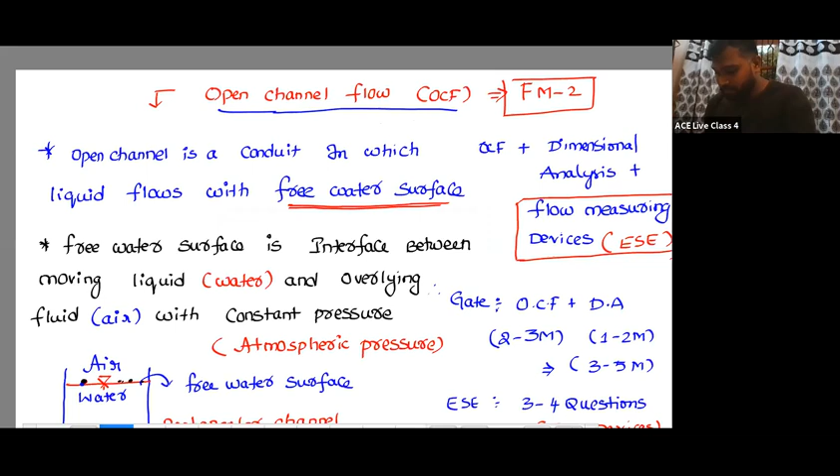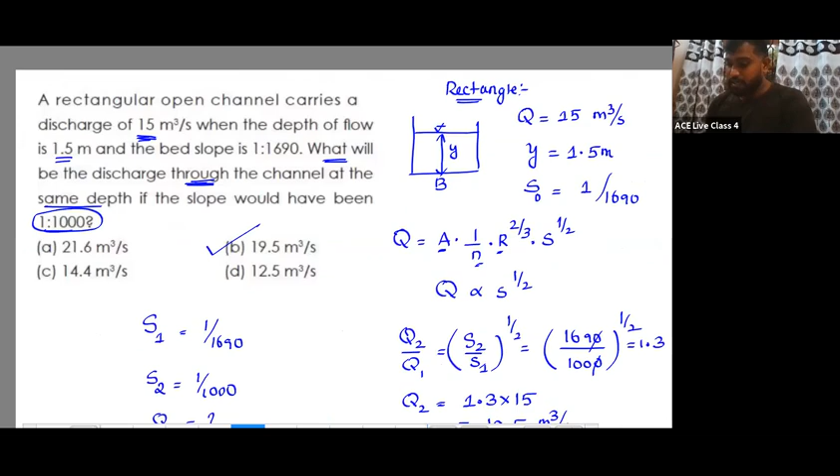Okay. So we have discussed this. In yesterday's class, we discussed the surges, and I have given you the question also. And we know how we have determined this. Okay. So now let's see the last part in the open channel flow.

Wave patterns. Wave pattern by dropping a stone in a flow, river, or pond. So how are the wave patterns going to be?

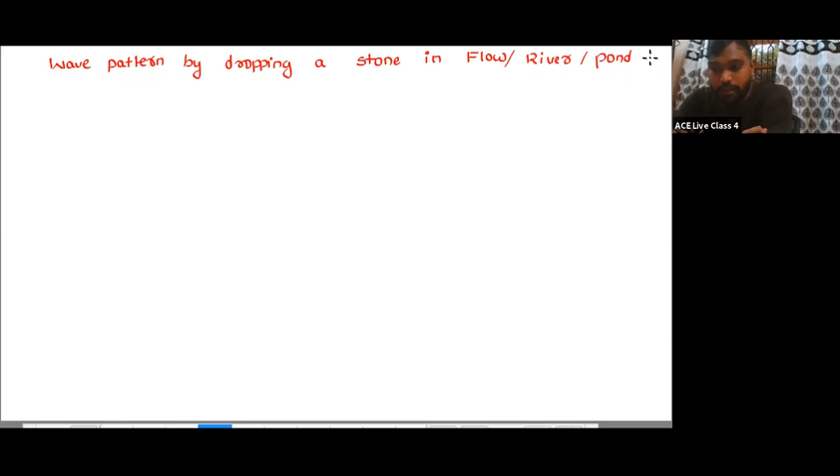See, there are different types of flows we have seen in open channel flow: subcritical flow, supercritical flow, and critical flow. Now, if these types of flows are there, then what happens to the wave pattern? How are the waves going to change? So the pattern the waves follow when you drop a stone in the flow of a river. Now, let's see that.

A. Give me a minute, please.

Okay. Now, let's see. So what happens when you drop a stone in the flow of a river? And based upon this, we can say whether the flow is subcritical or supercritical. Now, we know the celerity concept; I told you celerity means critical velocity of the wave. Yes or no? I have discussed the celerity concept.

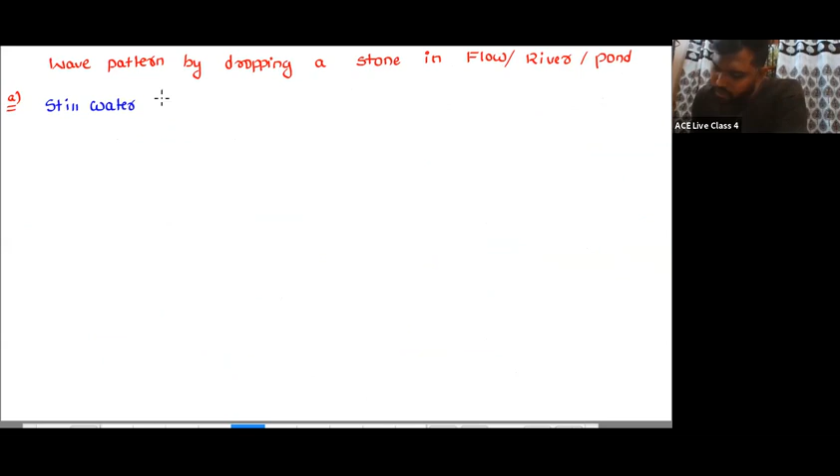yeah. So then definitely you're going to see some portion of the flow having some waves, right? Now, how are those waves going to travel? So now, first, if I drop a stone in a pond, means still water. What is the meaning of still water? Its velocity of flow is going to be zero. Let's see.

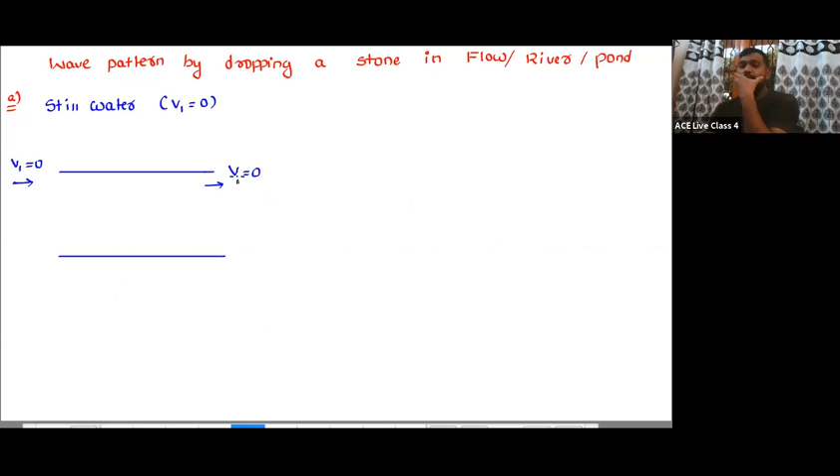In the top view, there is a top view, my dear. Now, this is the flow, but what is the initial velocity of the flow? Zero. The velocity of flow is zero. Okay. Now I am going to drop a stone over here, and this is the axis where I have dropped the stone.

Now if I drop a stone over here, what happens to the waves? See, when you drop a stone into a river or a pond, definitely you can see the waves. Yes or no? Some of the waves will travel towards the upstream, and some will travel towards the downstream. And whatever waves travel, they must have some velocity VW.

Okay. So when I drop a stone, some waves are developed, and you know what is the meaning of VW? Velocity of wave. And those waves have some velocity on the upstream side and the downstream side. Now, if you know that, then what is the celerity, please? On the upstream side, what is meant by celerity?

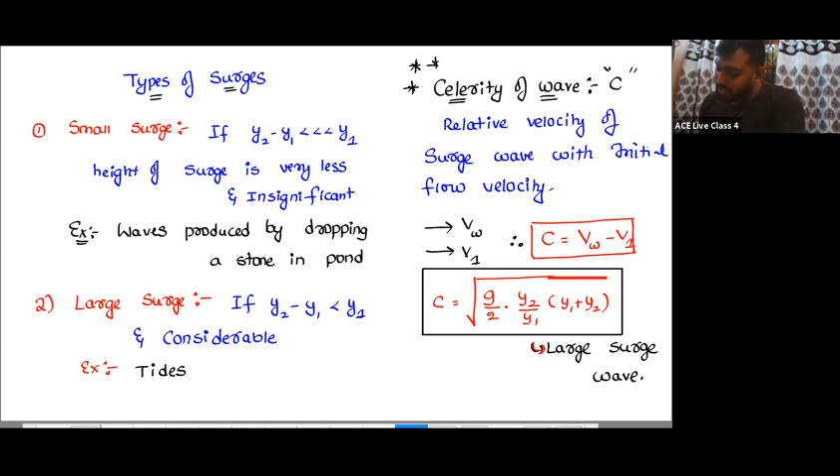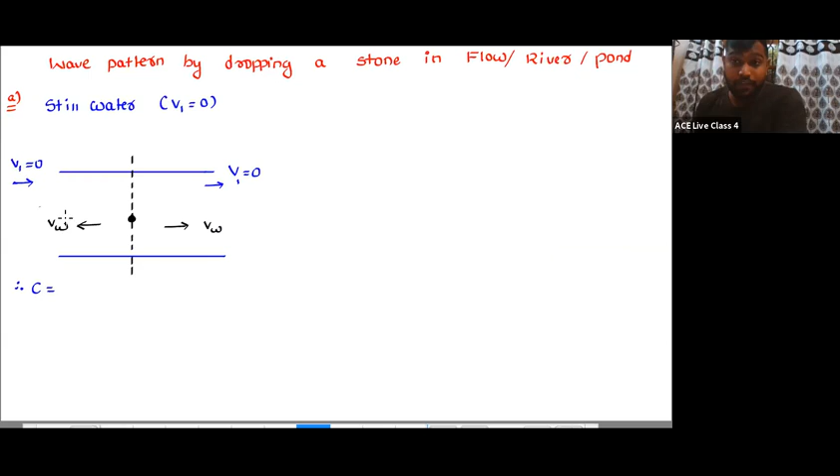Celerity means the relative velocity of the surge wave with respect to initial flow velocity. Now, when the surge is traveling towards upstream, see, both are moving in different directions or not. When both are moving in different directions, the relative velocity is VW plus V1. But here, the relative velocity is VW minus V1 because both are moving in the same direction.

And you know that whatever the velocity at critical flow, that critical velocity is nothing but celerity. Yes or no? Now, please observe. So what I do is I'll keep V1 as 0.

If I keep V1 as 0, now what is the velocity of the wave with which it is going to travel? The velocity of the wave with which it is going to travel is celerity. And that celerity is nothing but critical velocity or not? Yes or no? So keep that in your mind, my dear.

When you drop a stone in a pond where the initial velocity is 0, still water, some waves will move towards the downstream, some waves will move towards the upstream. So in both the cases, the wave must be having some velocity Vw, and in the case of still water, that velocity is the same on downstream and upstream. And if the waves are moving with the same velocity on upstream and downstream, are those waves symmetrical or unsymmetrical? Those are going to be symmetrical waves.

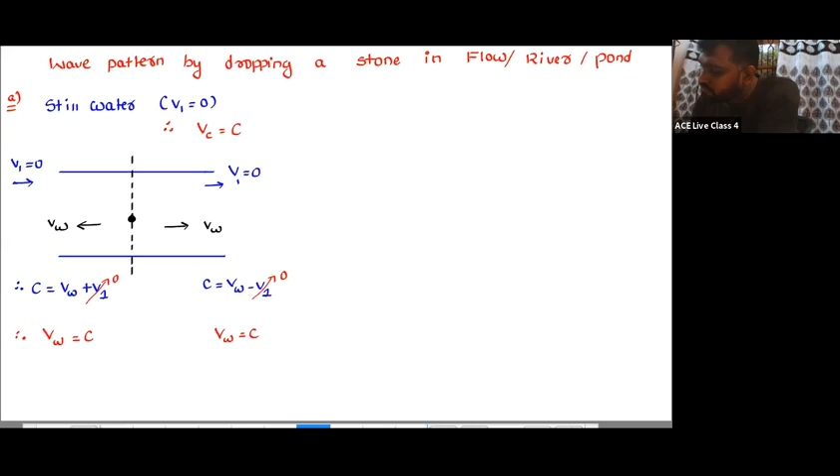So now if I draw the wave pattern, those waves are going to be symmetrical waves. Whatever the wave pattern here, when you drop a stone into still water, the waves developed are symmetrical to each other. So this pattern is going to be a symmetrical wave pattern. Can I say it as a symmetrical wave pattern? And waves move on both sides. So when you drop a stone, why?

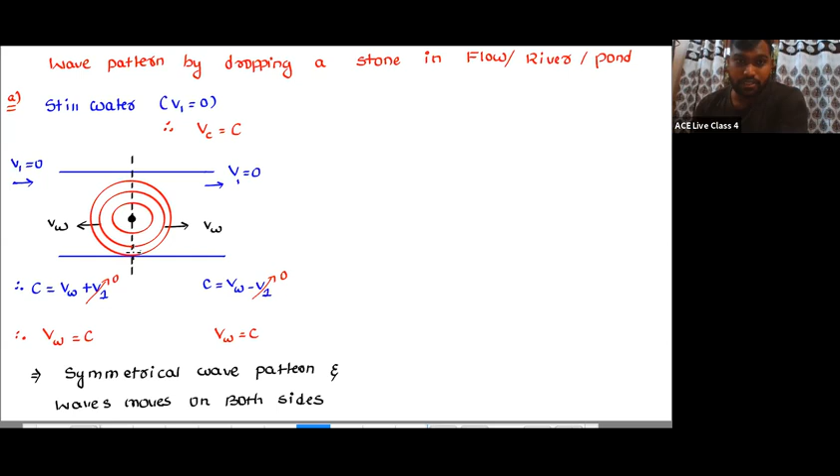If you're observing still water, if you drop a stone or keep some obstruction, you can see the ripples, and the ripples are the same on all sides in still water. Why? Because when you drop that stone, the waves move with the celerity in all directions. That's the reason it gets a symmetrical wave pattern. Okay.

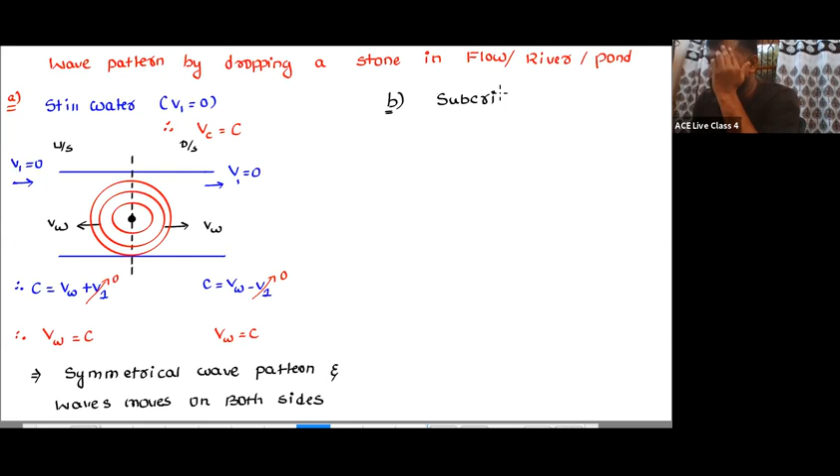So if V1 is 0, then how is it moving downwards? V1 is 0 means let's say it is still water. Generally I am taking this one as upstream and this one as downstream. Now let's see if it is a subcritical flow. What is the meaning of subcritical flow? It means a flow with a lesser velocity, the velocity of flow is less than the critical velocity. And what is that critical velocity? Critical velocity is nothing but C, means celerity. Yes.

Again, this is a river. Now in this case, this is the axis of dropping of a stone. This time the velocity V1 is not going to be 0. V1 is greater than 0. Let me say the flow is coming like this from upstream to downstream side. Now I am dropping a stone over here. So what is going to happen? Tell me. Same. These waves will move with some Vw, on both sides.

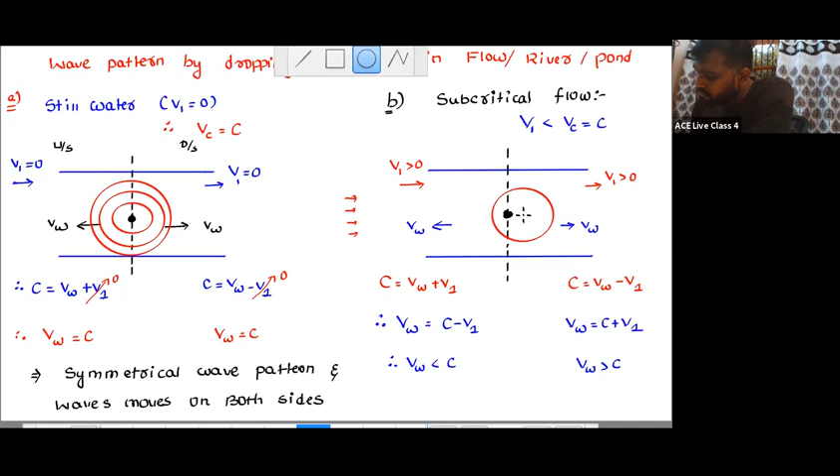You can observe more waves will travel towards the downstream. More waves will travel towards the downstream. So I can write: in subcritical flow, by dropping a stone, waves move in both directions, unsymmetrically or symmetrically? Unsymmetrically.

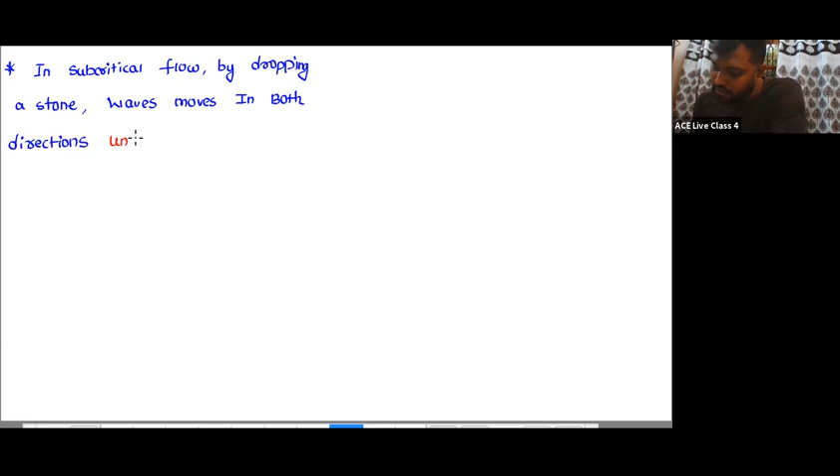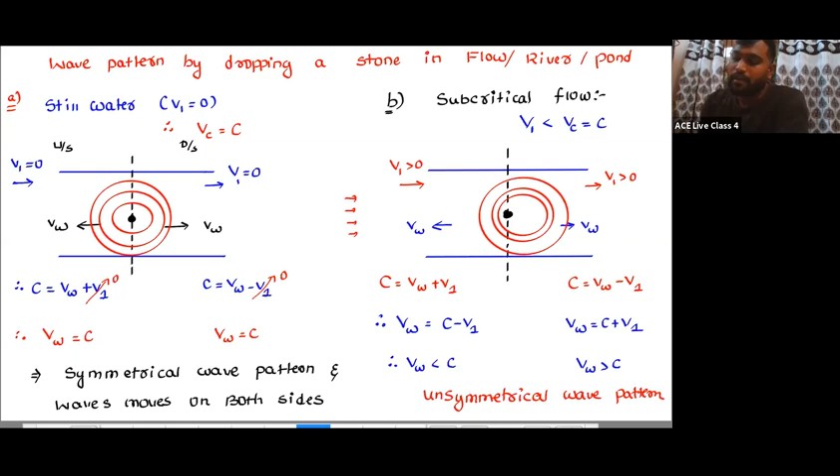With more on downstream side. So this is an unsymmetrical wave pattern. Okay. So I can say this is unsymmetrical wave pattern. Now, if you see, this is a subcritical flow, then let's see. I am increasing the velocity of flow. Earlier, I take the still water and then the subcritical flow. Now let's see the critical flow.

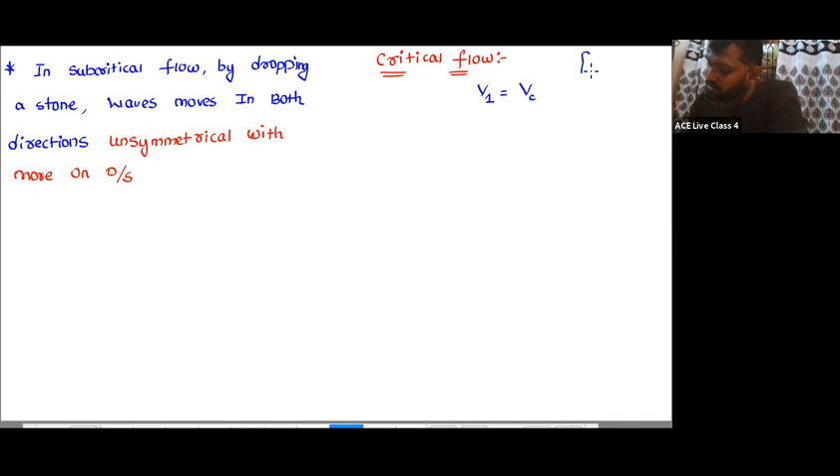Critical flow. What is the meaning of critical flow? Critical flow means whatever the velocity is nothing but the critical velocity, and you know that critical velocity is nothing but the celerity, right? We do know that critical velocity is nothing but the celerity. Now let's draw the same thing. Okay. So same.

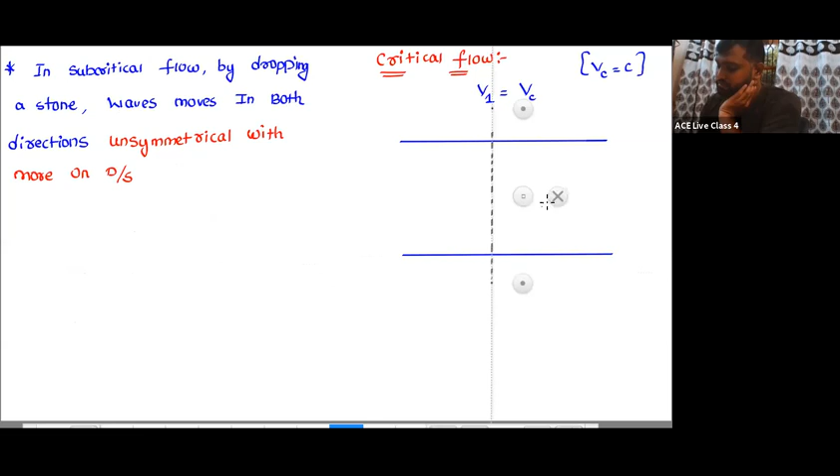Now I'm going to represent the axis where I'm going to drop a stone. This is the axis, and this is the point where I'm dropping a stone. But this time, the flow is moving with the critical velocity. Then when I drop a stone, what happens to the velocity of the surge wave? So here, celerity means VW plus V1. Here, celerity means VW minus V1.

Now, I want VW. What is VW? VW means C minus V1. Yes, sir. And what is V1, my dear? What is V1 in the critical flow? In the case of the critical flow, V1 is nothing but Vc and Vc is nothing but C. C minus C, then 0. And what about here? VW is C plus V1, C plus C, which is going to be 2C.

Yes or no? So now you tell me, in the case of the critical flow, when you drop a stone, on the upstream side, is there any wave pattern? On the upstream side, what is the velocity of the wave? 0. And on the downstream side, what is the velocity of the wave? 2C. You can see over here. On the upstream side, velocity of wave is 0. On the downstream side, velocity of wave is going to be 2C.

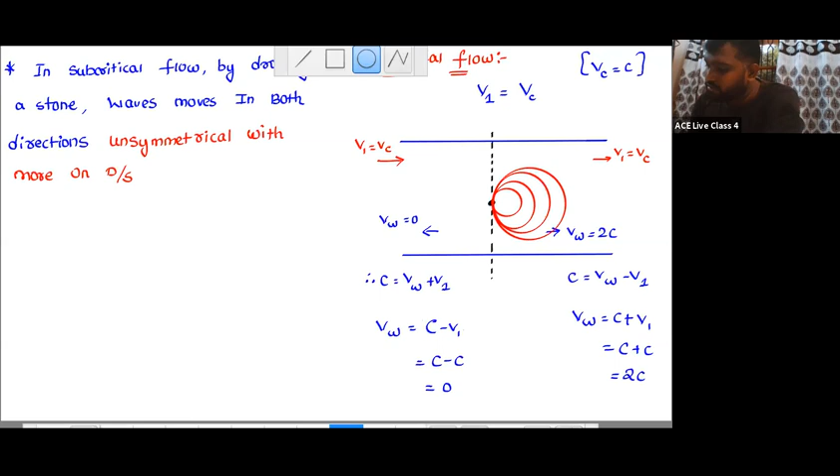Now you tell me, do you think any wave will travel towards upstream? No. No wave will travel towards the upstream. And every wave will travel towards the downstream only. Let's see. You see, all the waves are traveling towards whom? Downstream or upstream? Every wave is traveling towards the downstream, and all these waves are going to be generated tangential to the point of dropping of the stone.

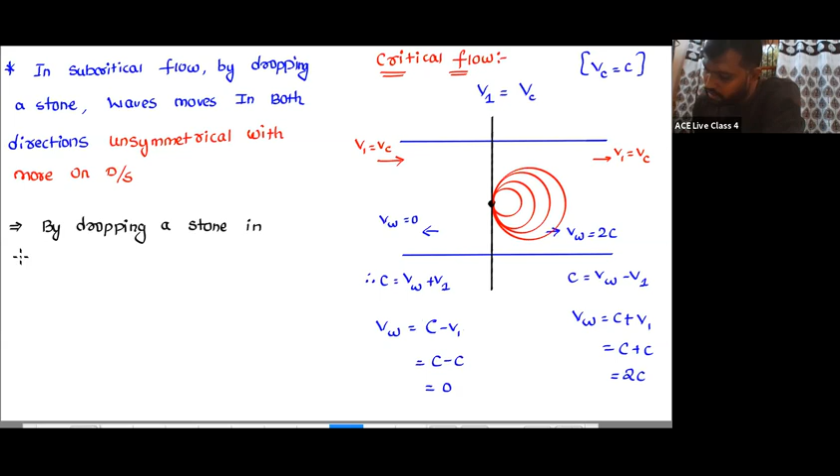So now I can write a point over here as, by dropping a stone in river or in critical flow, waves travel towards downstream side, and wave pattern is tangential to point of dropping of stone. This is nothing but a tangent, my dear, tangential to the point of dropping of the stone in the case of the critical flow.

So I hope you understood what is happening. As the velocity of the flow increases, the wave pattern is going to be moving more towards the downstream side. So yes, practically it is possible. Practically it is not possible, sir. Why we study this topic? To make sure what is going to happen in reality.

In reality, when the flow is there, if you want to predict the type of flow, whether it is subcritical or critical or supercritical, then you can simply keep a pen there, it will cause some disturbance, then the waves are going to travel. Wait a moment, then I can say that for you. Now, the last one is a supercritical flow.

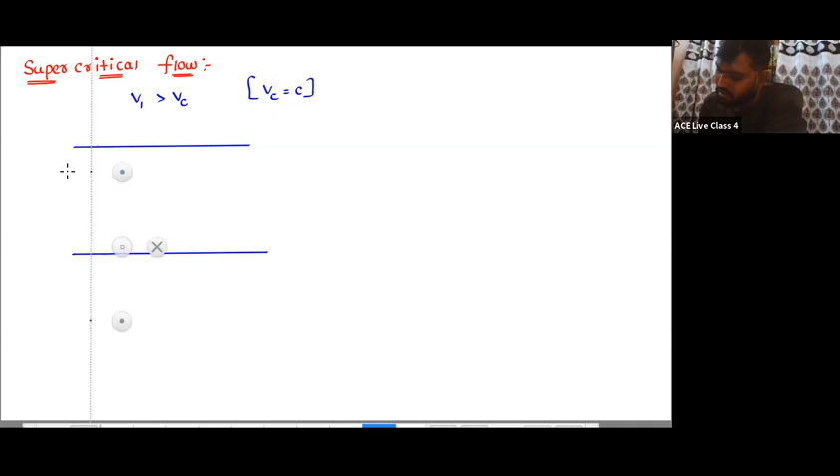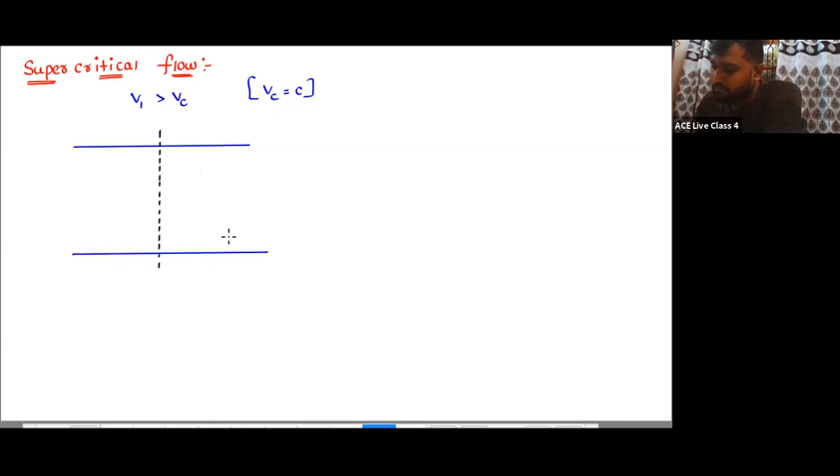Now, there is a point where I am dropping a stone. This time V1, celerity VW plus V1, celerity VW minus V1. Now here VW is nothing but C minus V1, and is V1 going to be more than C or not? Yes or no? So then this VW is going to be less than 0. And similarly here VW is C plus V1, and what is V1? V1 is greater than C. So VW is more than 2C.

Because what is the V1 value? V1 is more than Vc, which means V1 is greater than the celerity. So C plus greater than celerity is more than 2C, C minus greater than celerity is less than 0. See, the meaning of that is, whenever the velocity is going to be 2C, then all the waves are going to start at one point, and all the waves are going to be tangential to the point at which the stone is dropped.

But in this case, the waves will sweep more towards the downstream side, in an increasing wave pattern. Now see. In an increasing wave pattern, and it just looks like a cone. The wave pattern is going to be a conical wave pattern. So this type of wave pattern is the conical waveform.

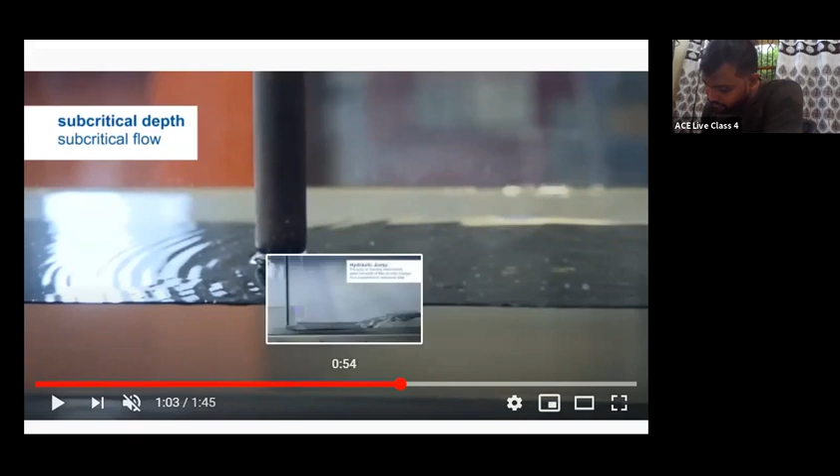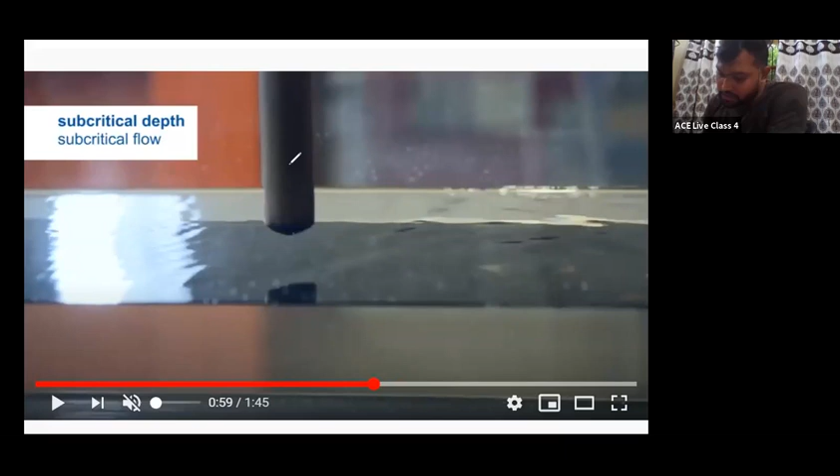Now, see in the case of the subcritical flow, what is going to happen? See here the waves are going to travel in such a way, if this is a subcritical depth. Now I am inserting a broom or a stick. This is the point where I am going to insert. Now let's see what is going to happen. Observe.

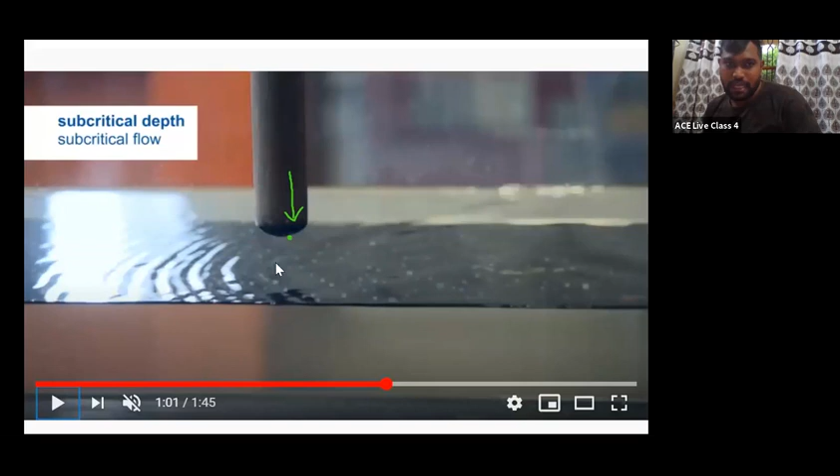So when I keep that, then again observe. You can see the wave pattern, how the wave flows. Yes or no? This is subcritical flow, because subcritical flow means the depth is more and velocity is less. You can see the flow is also moving very slowly. Now when I insert here, the flow is passing in this direction. This is upstream.

So now you can see more waves are going to travel towards the downstream side. So more waves will travel towards the downstream side. Now let's see. Yeah. So more waves are traveling towards this side, right? So in this flow, more waves travel, and less on the upstream. You can see the wave pattern over here. Now, similarly, in the case of the supercritical flow, how is it going to be seen?

In the supercritical flow, subcritical flow, yes, I hope you can understand. Now, you see, in the case of the supercritical flow, the flow is already moving from upstream to the downstream side. Now I'm inserting a broom over here. If I insert a broom over here or a stone over here, now you observe what is going to happen.

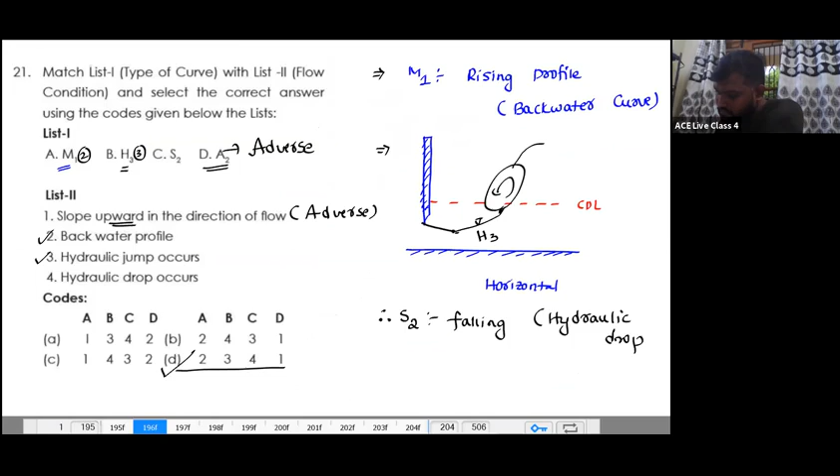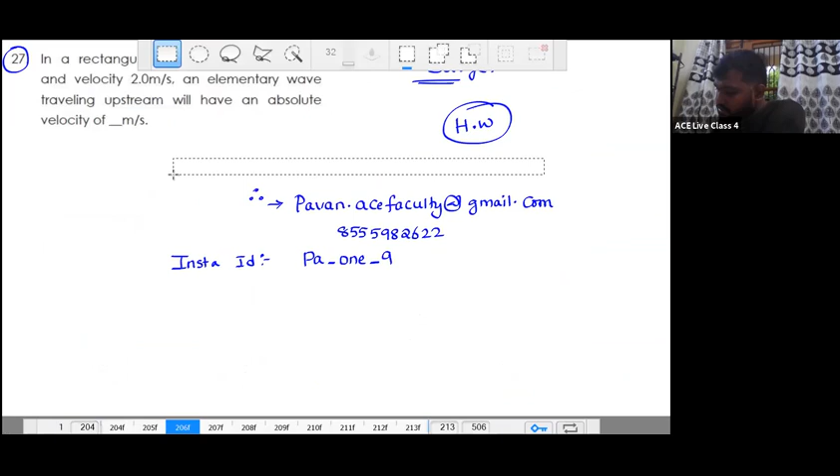Yeah, there is a chance of increasing the weightage for FM2 as they have removed the hydraulic machines. So, okay, yesterday I gave a homework problem, right? Yes, this homework problem, I hope you have done this question. I asked you this as a homework question. Let's see that question, please.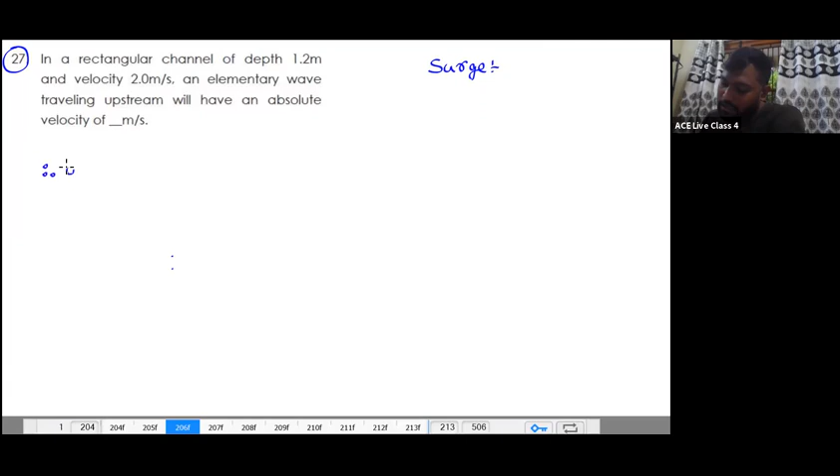Okay. In a rectangular channel of depth 1.2 meters and velocity 2 meters per second, an elementary wave is traveling upstream. You see, they have given the depth 1.2 meters, velocity V1 as 2 meters per second. An elementary wave traveling upstream will have an absolute velocity. If the elementary wave is traveling upstream, generally the flow is towards downstream. Then what is the celerity? The celerity is VW plus V1, because they're opposite in direction, right?

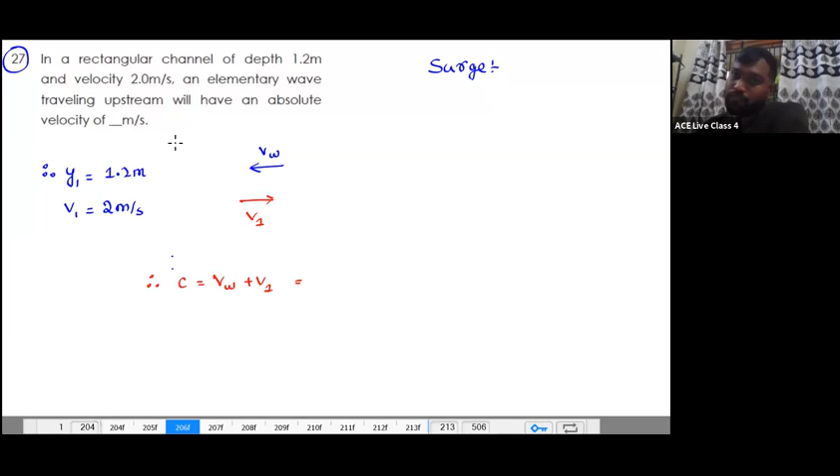Now, you know that this is celerity. Did they mention anything regarding a small surge or large surge? No. I told you when they don't mention anything, you always go with the small surge. Because you don't know the depth, right? You don't know what happened due to that surge. Has the depth been doubled, increased or decreased?

We don't know that. So now, VW plus 2 is equal to root of 9.81 into 1.2. What is this VW, please? Minus 2. The answer is going to be 1.43 meters per second. So that's about the question. Now, let's see the next topics. I hope you understood this.

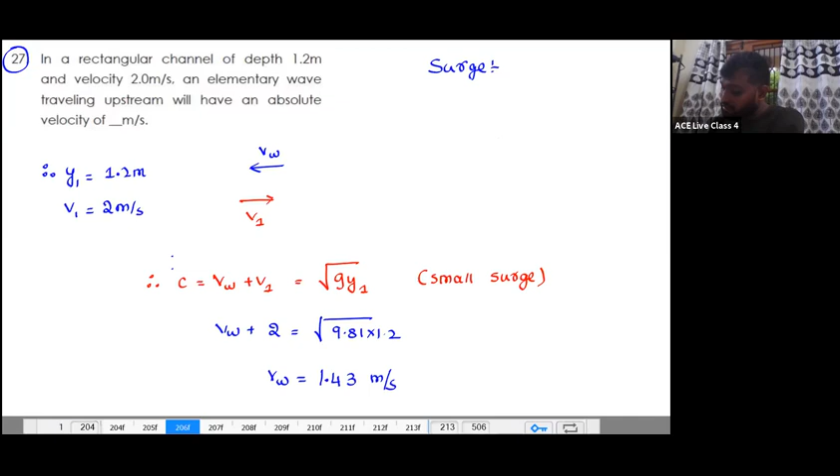Next, the new topic: dimensional analysis. Now, in the case of dimensional analysis, what is meant by dimensional analysis? Why are we going to discuss it? See, this is not only about open channel flow. This is about pipe flow, and this is about civil engineering, what we are going to discuss here.

So what is meant by dimensional analysis? The first definition of dimensional analysis is it's a mathematical technique. Why do we name it dimensional analysis? As a layman, we are going to analyze any civil engineering problem, or any engineering problem, because we can use dimensional analysis for all engineering.

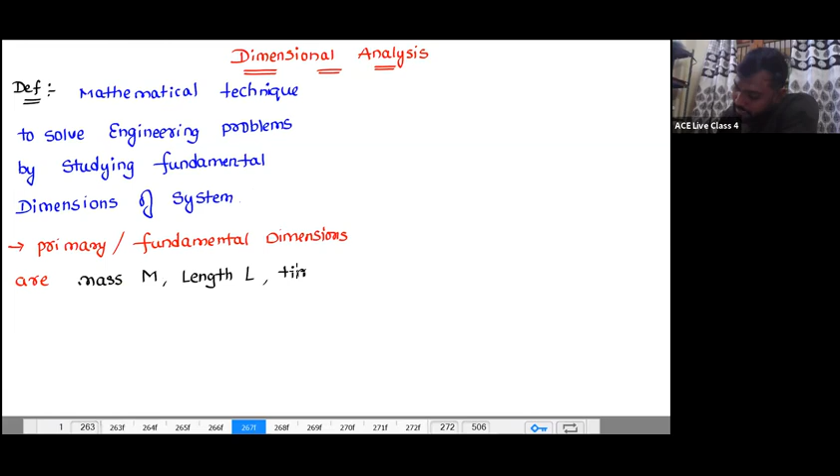Okay, now the primary or fundamental dimensions are mass, represented with the capital M, length, represented with the capital L, time, represented with the capital T.

Okay, and if you go for the temperature in mechanical engineering, you have to look over the thermal also. So there the small t represents the time and the capital T represents the temperature. And in the case of electrical engineering, there you have to look over the electric current in terms of amperes, I, also. But for our civil engineering problems, what we discuss is majorly M, L and T.

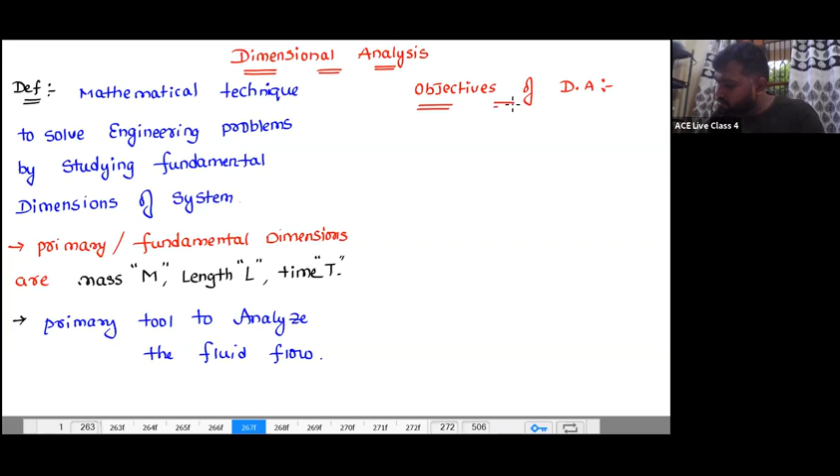So dimensional analysis is going to be a primary tool to analyze the fluid flow. Now let's see what are the uses or objectives of the dimensional analysis. What are the objectives of the dimensional analysis? Objectives of dimensional analysis, or uses of the dimensional analysis.

Okay. See, once I know the system, for example, when a flow is happening, the flow rate is passing through the channel, that is nothing but discharge Q. And how come I say Q is equals to A into V? It is by checking the dimensional homogeneity of the system. For example, if I take Q is equals to A into V, what is the units of Q here? Nothing but meter cube per second.

What is the units of the area? Meter square. What is the units of the velocity? Meter per second. Yes or no? So here meter cube per second, here also meter cube per second. Which means on LHS and RHS, the dimensions are same. And when they are same, they are dimensionally homogeneous to each other, means whatever quantities I have taken on the left and the right, both are having the same dimensions. If they are not having same dimensions, then they are going to be dimensionally non-homogeneous.

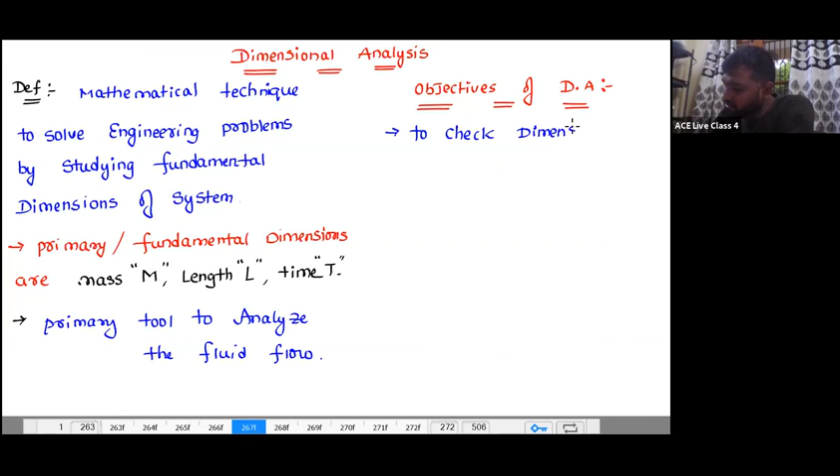So point number one, the simplest use is to check the dimensional homogeneity of any equation in fluid motion. You check any equation. So point number one, to check dimensional homogeneity of any equation in fluid flow. This is number one. And number two is to reduce the number of variables. For example, I'll give you one question.

Because see, if I send some flow rate of 10 meter cube per second, do you think the velocity of flow will be the same in a rectangle and a triangle? No. So it depends upon the shape. The velocity depends upon the shape of the channel and the size of the channel. The velocity depends upon the roughness of the channel. And the velocity depends upon the bed slope of the channel. So which means there are lots and lots of factors.

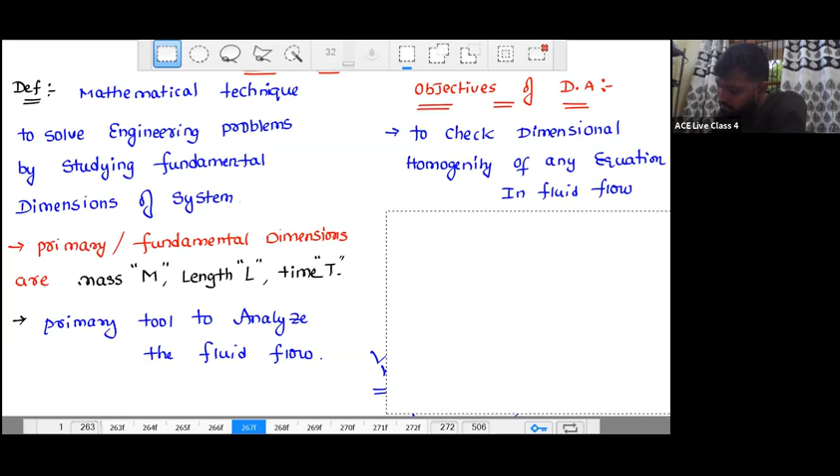so point number 2 is to reduce the number of variables in the system by dimensionless groups. How we are going to reduce it to dimensionless groups and find out the analytical solution, we'll see it later. First is dimensional groups and all those things. I'll take one example, and based upon that example, I'll explain that.

Now, the last one, this is very important, is known as model tests. For example, we are civil engineers. We want to construct a dam, or we want to construct a weir. Are you going to go to the site directly, construct the dam directly, allow the flow to the dam, and then check how the dam is acting under the action of water? Are you going to construct the structure directly and then analyze the behavior of that dam under the action of water?

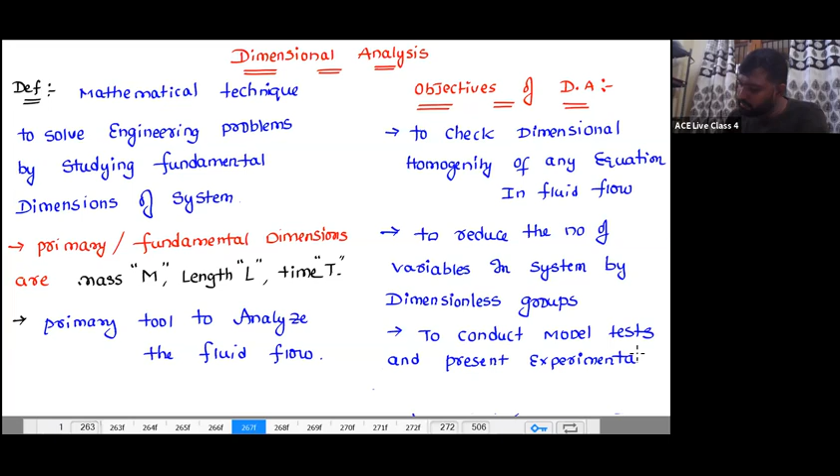Okay. The model means a small scale replica of the actual structure. The actual structure means prototype. Remember, whatever construction we do, that is a prototype. And based upon that, we create a small scale one that is known as a model. So we conduct the model test and present the experimental results. So these are the objectives of dimensional analysis. Now let's see.

Okay. Now let's see the first, dimensional homogeneity. What is meant by dimensional homogeneity? An equation is said to be dimensionally homogeneous if the dimensions on both sides, LHS and RHS, are the same. Okay, so that's dimensional homogeneity.

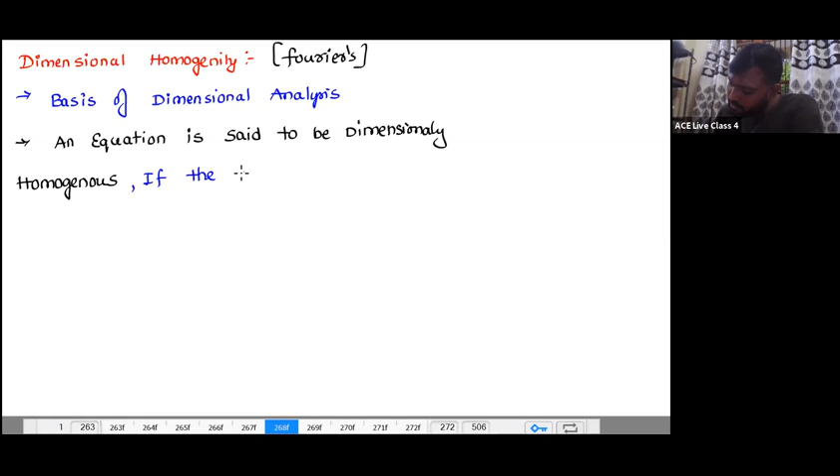An equation is said to be dimensionally homogeneous. An equation is said to be dimensionally homogeneous if the dimensions of the system are same on LHS and RHS. So if the dimensions of the system are going to be same on LHS and RHS, we call it dimensionally homogeneous.

Example, all derived equations are dimensionally homogeneous. All derived equations are dimensionally homogeneous. And the examples are, just say, Q equals AV, F equals MA, and even Chezy's equation. The Chezy's equation is also going to be a derived equation only, right?

So this is nothing but P equals rho GH. Yes. So these are all the derived equations. Momentum flux, M equals rho QV. So all are the derived equations. So for all these derived equations on LHS and RHS, the units are same. The dimensions are same.

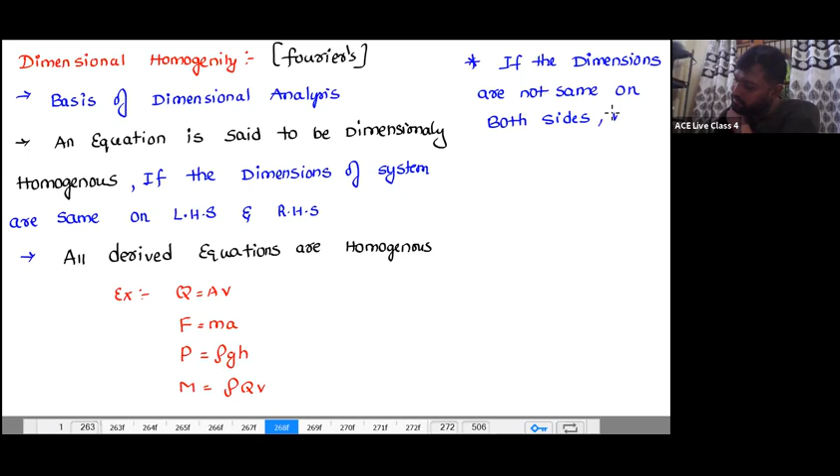Now, if the dimensions are not same on both sides, then the equation is said to be dimensionally non-homogeneous. Equation is said to be dimensionally non-homogeneous. So if the dimensions are not going to be same on both sides, then it's going to be dimensionally non-homogeneous.

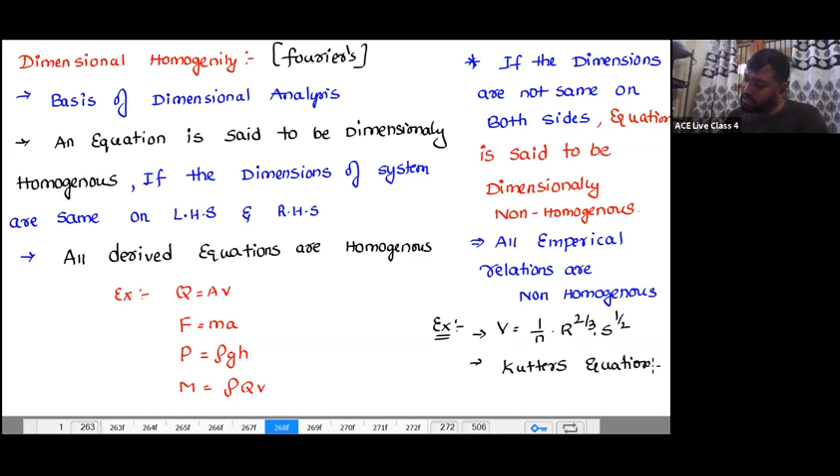And all empirical relations are non-homogeneous. All the empirical relations are non-homogeneous. Examples, what we know, velocity equals 1 by n into R to the power of 2/3 into S to the power of 1/2. In irrigation, you are going to see Kutter's equation. There are a lot of equations. Kennedy's equation. These are all empirical relations.

You don't know the remaining things of fluid mechanics and irrigation yet, so that's the reason I'm going with whatever discussion I made. So this is about dimensional homogeneity. To check dimensional homogeneity, simply look at the LHS and RHS units, and if both are same, then you say it is dimensionally homogeneous. If they're not same, it is dimensionally non-homogeneous.

Okay. So this is the first objective, and it's already 8:30. The next one, to reduce the number of variables in the system by dimensionless groups, will take a lot of time, but once we start, it won't stop.

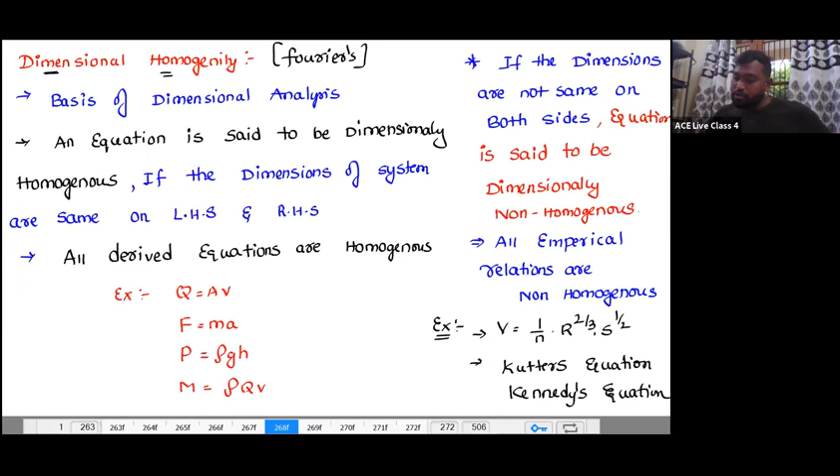So the methods of dimensional analysis will help if the total number of variables in a group are known; then they give you the relation between the variables by dimensionless groups. If the total number of variables in the system is known, the relation between those variables can be obtained by two methods,

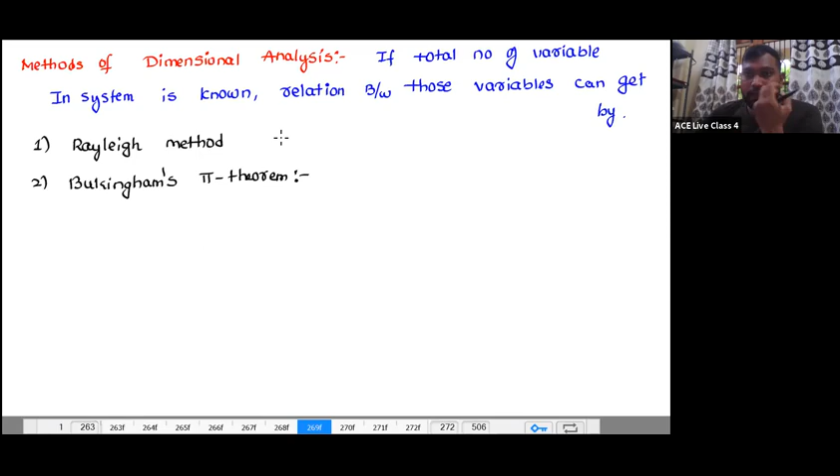Rayleigh's method, and the second one is Buckingham's pi theorem. Okay. So two methods. One is Rayleigh's method, and the other one is Buckingham's pi theorem. So whatever system you take, if you know the total number of variables, then the relation between those variables can be obtained by means of Rayleigh's method and Buckingham's pi theorem.

Okay, but Rayleigh's method is not useful if the number of variables is more than 3. If the number of variables is more than 3, Rayleigh's method is not much use. So if more variables or parameters are in a given system, then you must go for Buckingham's pi theorem. And moreover, in Buckingham's pi theorem, the number of dimensionless groups will be known earlier.

Dimensionless... can get as dimensionless groups. Dimensionless are non-dimensional. The number of dimensionless groups we will get to know earlier.

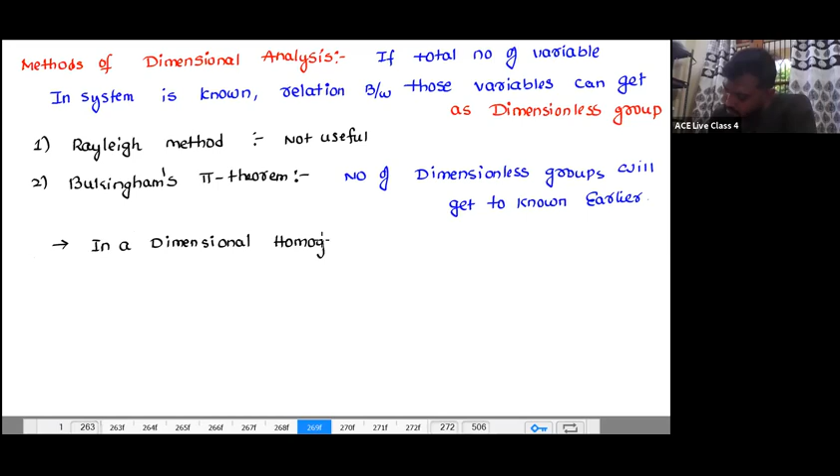So what are the variables with fundamental dimensions? M, L, T. So whatever the variables are that are having fundamental dimensions as m. So if the total number of variables are n, according to the Buckingham's pi theorem, in a dimensional homogeneous equation, if there are n total variables or parameters, which means dependent plus independent. So both dependent variables plus independent variables.

Like for example, Q is equals to AV. Is it a dimensional homogeneous equation or not? Yes. Listen to me, I'm going to take one big example. But as of now, let's take Q is equals to AV. That means the flow rate passing through the channel or a medium depends upon area, the cross-section area, meaning channel geometry or pipe geometry, and the velocity of the flow passing through it.

Yes or no? So in the equation Q is equals to AV, how many variables are there total? 1, 2, 3. So 3 variables are there. And who is dependent and who is independent? The discharge is going to be the dependent, and the area and velocity are independent. So in a dimensional homogeneous equation, if there are n total variables or parameters, here 3, which consists of dependent plus independent.

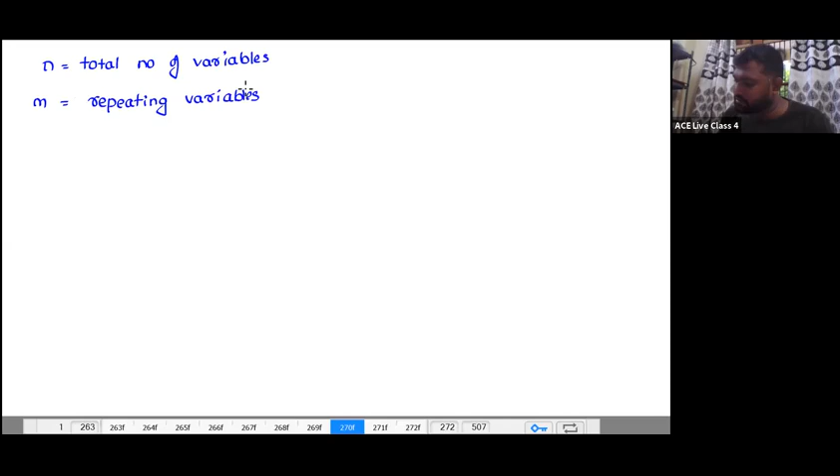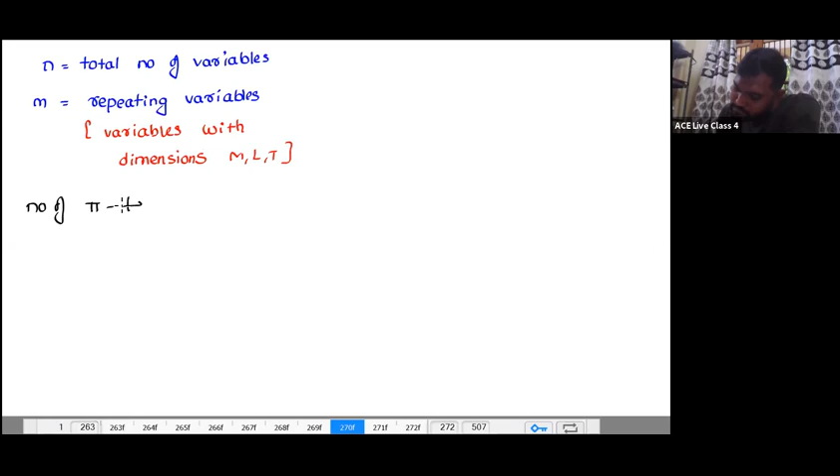Where n is the total number of variables, and m is also known as repeating variables, which means variables with dimensions MLT. Now, the number of pi terms is represented with n minus m. Okay, fine.

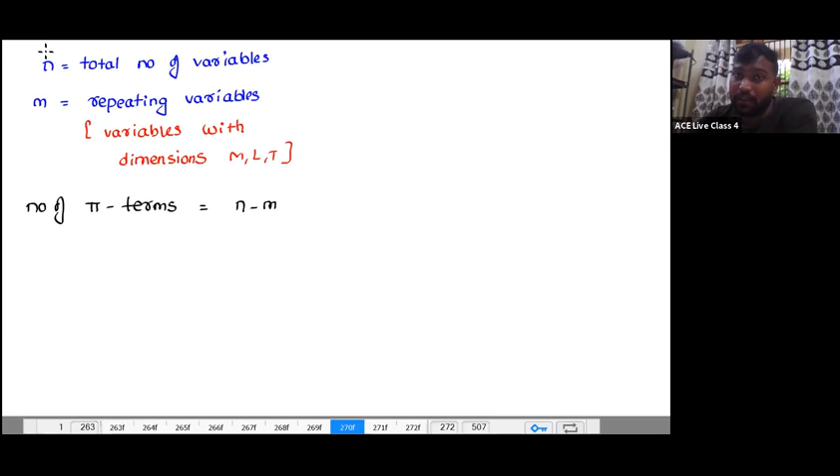Now, how do I get the relation between these variables? For getting the relation between the variables, first of all, you need to know how to select the repeating variables. I know the total number of variables, and now we need to know how to get the repeating variables. Selection criteria of repeating variables.

Point number one, in the given system, let's take Q is equals to A into V. So how many total number of variables are there? 3. And this is going to be the dependent and these are going to be the independent.

Okay. So here Q is going to be the dependent and A and V are going to be the independent. Yes or no? So now you see in this case, point number one, the dependent variable should not be selected as a repeating variable. Means you should not take Q as a repeating variable.

So point number one, dependent variable should not be selected as a repeating variable.

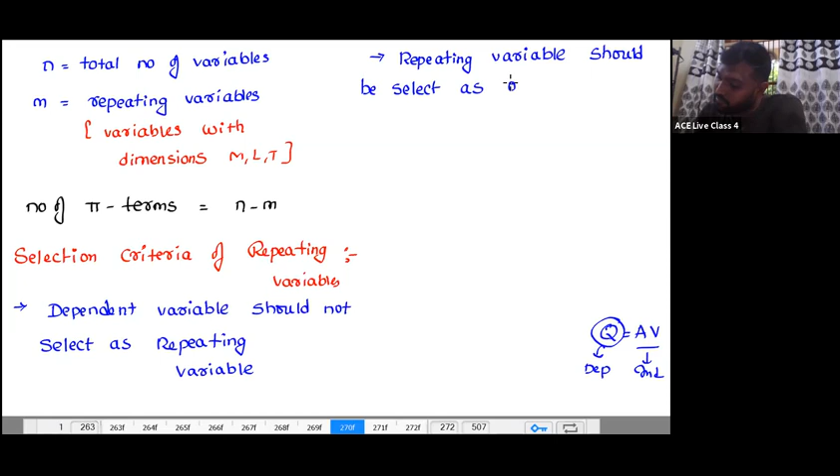Okay. Now, point number two, repeating variables should be selected as: one variable has geometry details, or geometry property, other has... repeating variables. So how many are there?

One variable has geometry details, which means one variable should consist of geometry, like L. Other has kinematic property, and another has fluid property. Okay, so keep that in your mind.

Now while you are taking the repeating variables, the maximum number of repeating variables would be 3. Why, sir? What are the total number of primary dimensions we are dealing with? 3. What are those? M, L, T. So while you are selecting the repeating variables, number one, whatever the variables I give to you, you don't take Q as a repeating variable because this is dependent.

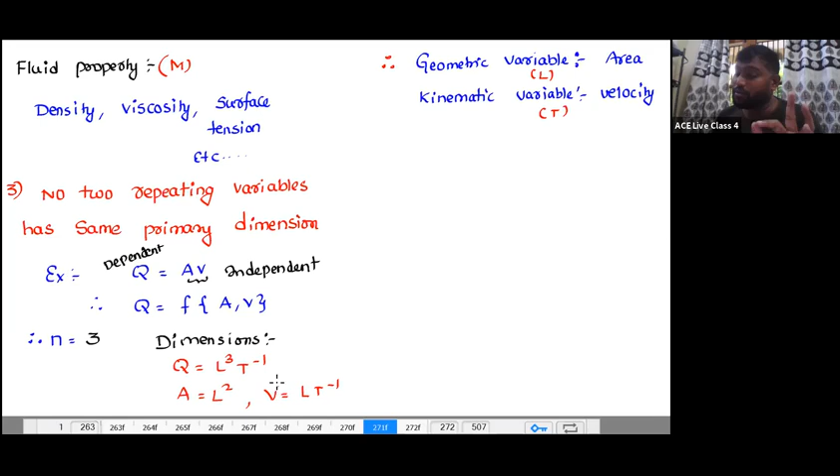The kinematic variable here is going to be velocity, because in the case of area, the primary dimension is L. In the kinematic one, I have already taken L, so there is T, and with respect to T, that is the kinematic variable. And what about the fluid property? The fluid property is going to be 0. Nothing is there.

So how many repeating variables are there? Only 2, my dear. And those repeating variables are A and V. Now the number of pi terms is n minus m, which is 3 minus 2, equals 1.

For further understanding, I'll give you one more example. Example 2: the time period of a pendulum depends on length L and gravity G. Then what is the number of variables here? Please tell me. Now I want the number of pi terms.

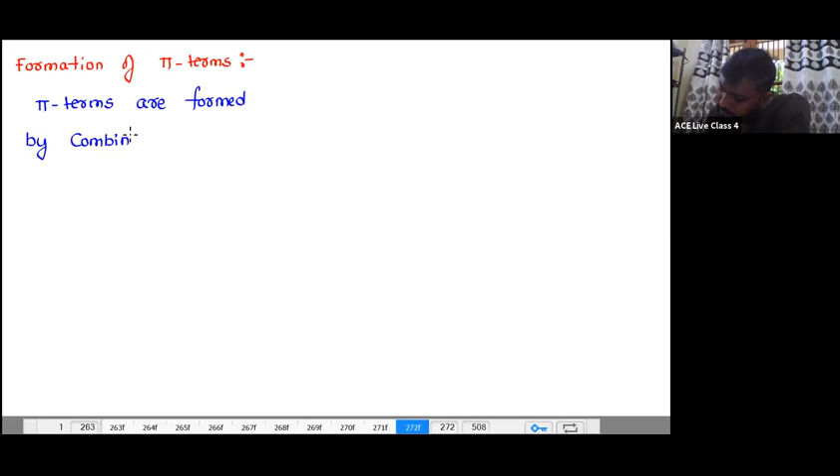So what is the procedure? Once I know the number of pi terms, how are we going to form the pi terms? Formation of pi terms: pi terms are formed by combining m variables out of the total number of variables.

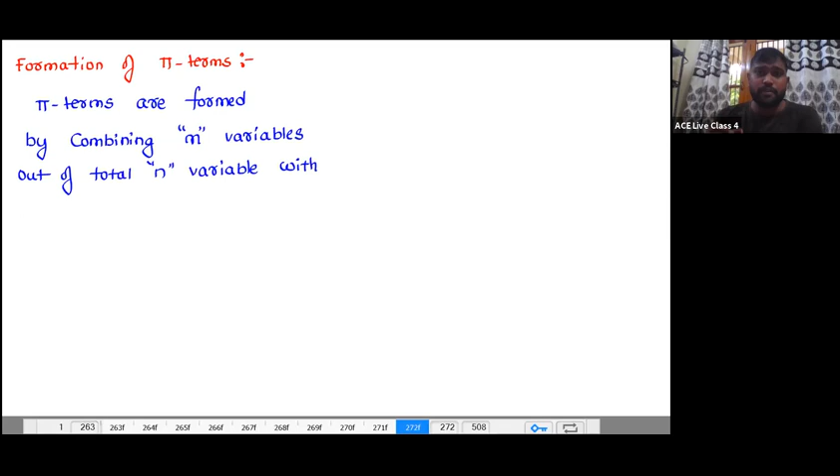With one of the remaining n minus m variables. So pi terms are formed by combining m variables out of the total n variables with one of the remaining n minus m variables. So what is the meaning of this?

How many number of pi terms are here? One. Only pi 1. Pi 1 is equal to... So how am I going to repeat this one? The repeating variables are going to be... you are going to combine the repeating variables. What is the repeating variable over here? A and V. Yes, A to the power of a1, V to the power of b1. See what I am doing over here, observe this point clearly.

So the pi 1 value, how we are going to find it, is by combining the m variables. What are the m variables? A and V. A power a, V power b. And with one of the remaining n minus m variables. See, what is the remaining n minus m? The m variables are A and V, and the n variables are Q, A, V.

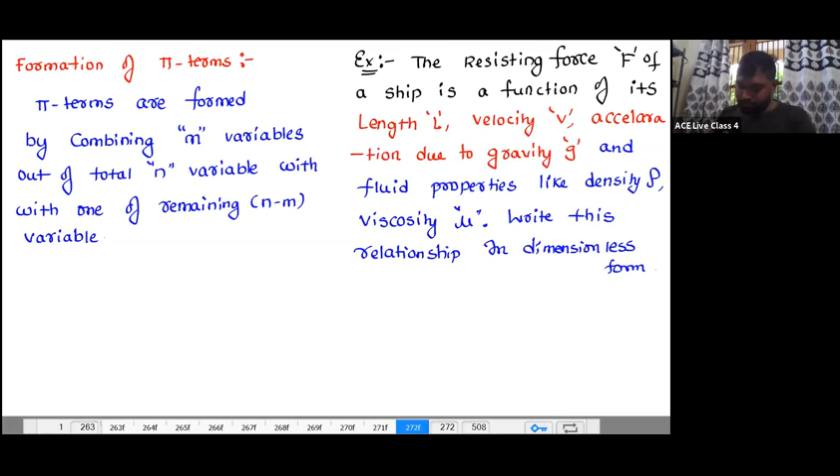Write this relationship in dimensionless form. Okay, let's see how to find this one. The Q equals A, V example was a very small one. So now, listen to me. Solution. In step number one, you first write down the total number of variables. The variables are F, L, V, acceleration due to gravity G, density rho, and viscosity mu. F, L, V, G, rho, mu.

Now you can see, force is a function of length, velocity, acceleration due to gravity, density of fluid, and viscosity of the fluid. How many total variables are there? The dependent is going to be F. What is N? N means dependent plus independent variables. Dependent is force, plus five independent, so six. The number of variables is going to be 6. So first, in the given system, you take the total number of variables.

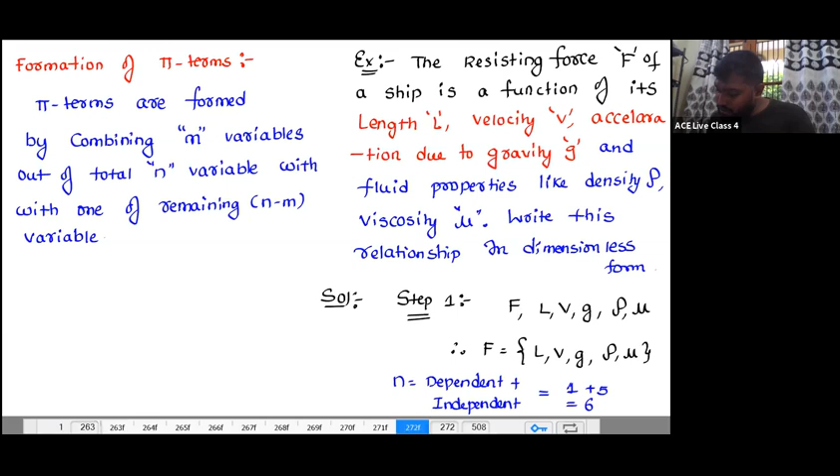Once you know the total number of variables, you take out the dimensions. Step number 2: dimensions for all those things. First of all, you know the units of the force. What are the units of the force? Mass into acceleration, kg meter per second square. Yes or no? First I will go with the units, and once I know the units, I can find the dimensions also.

Units of the force: force is mass into acceleration, kg meter per second square. Next, length in meters. Velocity in meter per second. Acceleration due to gravity, meter per second square. Then density: mass per unit volume, kg per meter cube. And what about the viscosity? This is dynamic viscosity, which is kg per meter second.

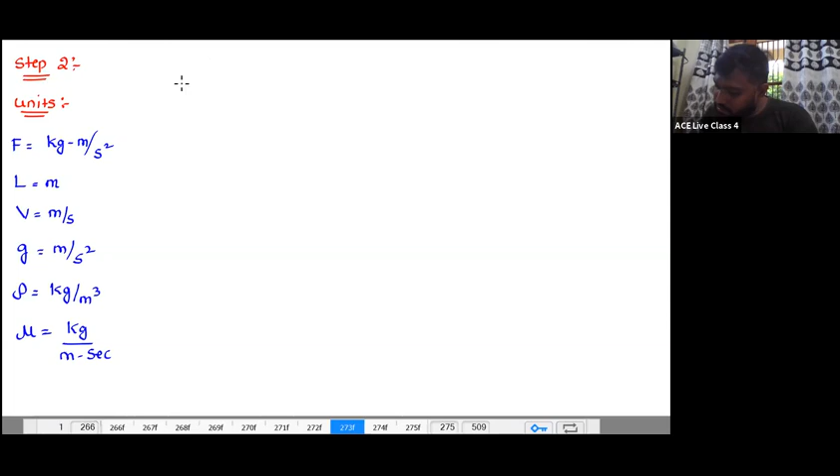In terms of dimensions, force is kg means mass, meter means L, s means time, so M L T to the power of minus 2. And L means L only. Velocity, meter per second, L T to the power of minus 1. Acceleration due to gravity, meter per second square, L T to the power of minus 2.

Density, kg per meter cube, M L to the power of minus 3. Viscosity, M L to the power of minus 1, T to the power of minus 1. So these are the dimensions. Once I know the dimensions, now coming to step 3. Step 1 is this one, step 2 is dimensions. Next comes step 3.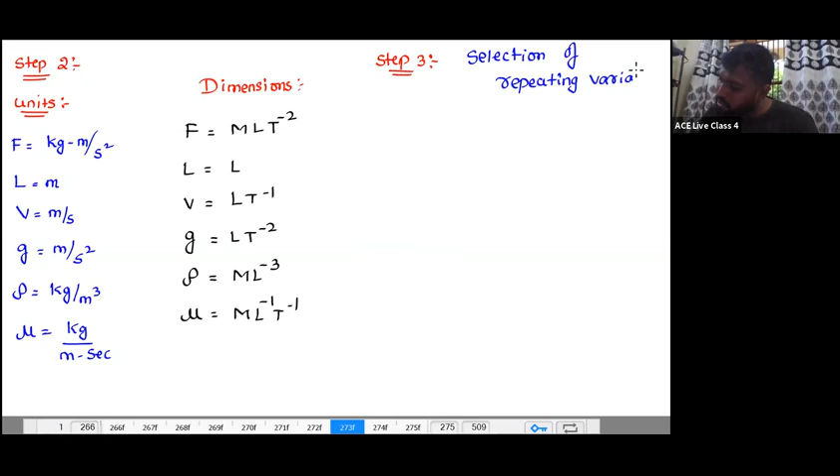Step 3 is selection of repeating variables. So how are we going to select the repeating variables? The people who haven't understood it, you can observe here in this case. First point, the dependent variable should not be considered as a repeating variable.

Now, point number 2. What are the geometric variables over here? Length is the only geometric variable. Yes or no? And kinematic variables are wherever you see the time. Velocity comes under kinematic and gravity also comes under kinematic.

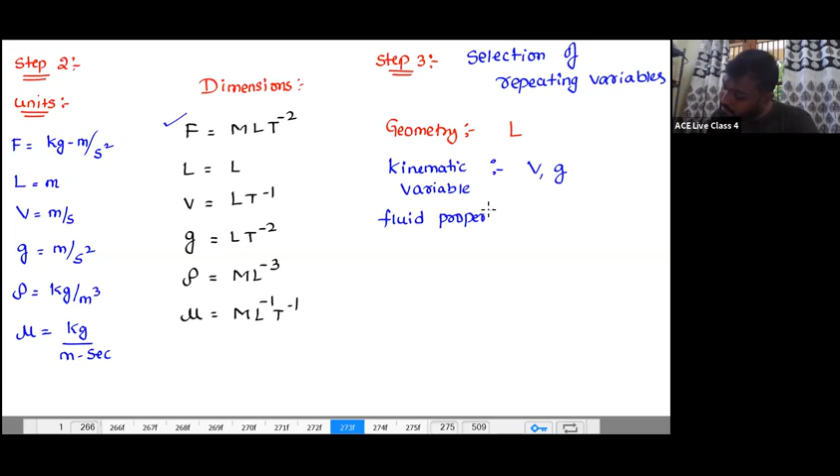And what are the fluid properties? Wherever mass is there. See, first length. Once I write length, I don't care about length. I look over time, so time means V and G. Now mass means density and viscosity. So here there are two kinematic variables, two fluid properties and one geometry.

Then how do I fix the repeating variables? What is the meaning of repeating variables? One variable must be geometric, one variable must be kinematic, and one variable must be a fluid property. Yes or no? Now come to the last point. What is the third point I mentioned?

No two repeating variables have the same primary dimension, which means if I take a repeating variable with respect to geometry, only L should be there. And with respect to kinematics, only one variable should be there. V and G are both kinematic variables, but no two repeating variables should have the same primary dimensions.

So the repeating variables are: first, with respect to geometry, I take L. Now, in the case of kinematics, how many variables are there? V and G, velocity and gravity. Both are kinematic, but no two repeating variables have the same primary dimension. So can you take these two or only one? With time, only one repeating variable should be there.

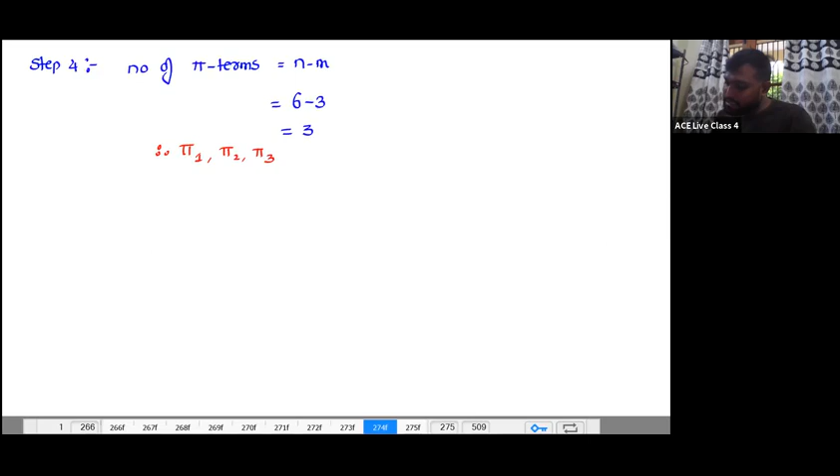Now the last step: formation of the pi terms. Pi terms are formed by combining the m variables out of the total n variables with one of the remaining n minus m variables each. Now, what are the m variables here? L, V, rho. So pi 1 is L to the power of a1, V to the power of b1, rho to the power of c1, combined with one of the remaining n minus m variables.

So what are the remaining n minus m variables? 3 variables. Total how many are there? 6. L, V, rho are taken. What are the remaining things? F, g, mu. Apart from the m variables, whatever is left over is F, g, mu. Now I'll write down the pi terms by combining these m variables with one of the remaining, meaning only F. So pi 1 with respect to F.

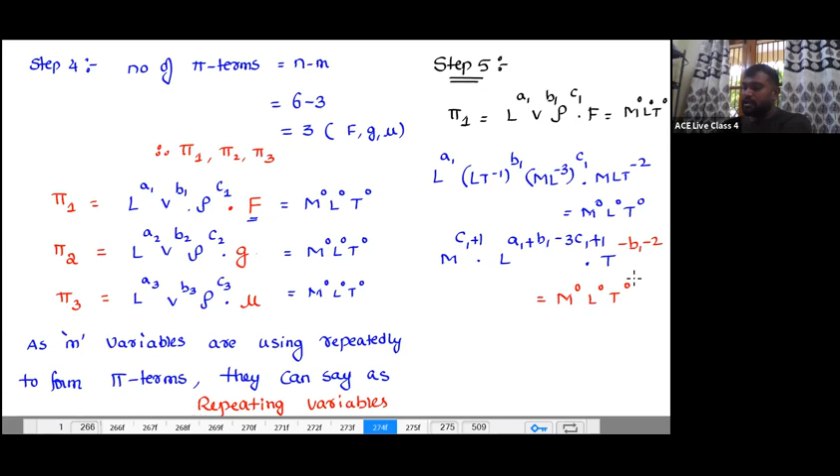Then T to the power of minus B1 minus 2 is equal to M to the power of 0, L to the power of 0, T to the power of 0. In step 5, I am simply substituting the dimensions, because the meaning of dimensional analysis is the study of the dimensions. Now find C1 plus 1. So LHS is equal to RHS. This is nothing but dimensional homogeneity.

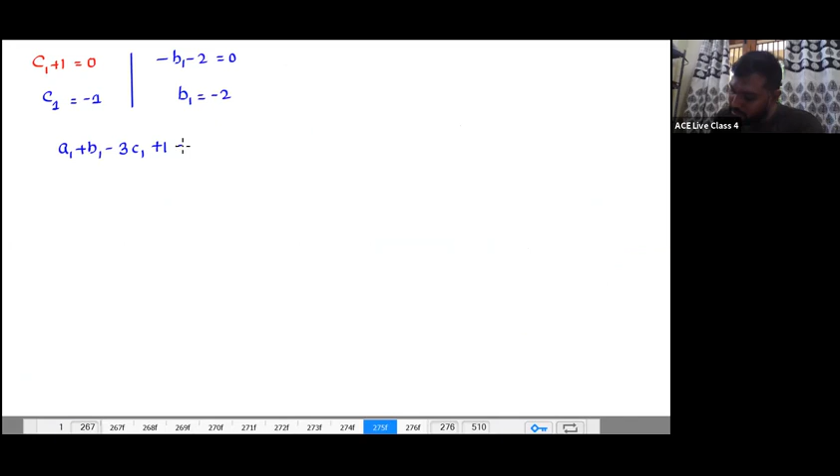So from here, C1 plus 1 is equal to 0, so C1 is minus 1. Similarly, minus B1 minus 2 is equal to 0, so B1 is equal to minus 2. Don't ask me why we are taking 0; we equate the powers. Now the L power: A1 plus B1 minus 3C1 plus 1 is equal to 0. So A1 minus 2 minus 3 into minus 1 plus 1 is equal to 0.

So what is the A1 value? Minus 2 plus 3 plus 1 gives 2, and it goes to the other side, so A1 is minus 2. Now I know the A1, B1, C1 values. So pi 1 is L to the power of minus 2, V to the power of minus 2, rho to the power of minus 1 into F. And this pi 1 can be written as F by rho L square V square. That's it.

So similarly, see, I hope you understood the first one. Haven't you? Please observe what I have done: A1, B1, C1. So LHS is equal to RHS. And what are the dimensions over here? F by rho L square V square, which is nothing but a ratio of the forces.

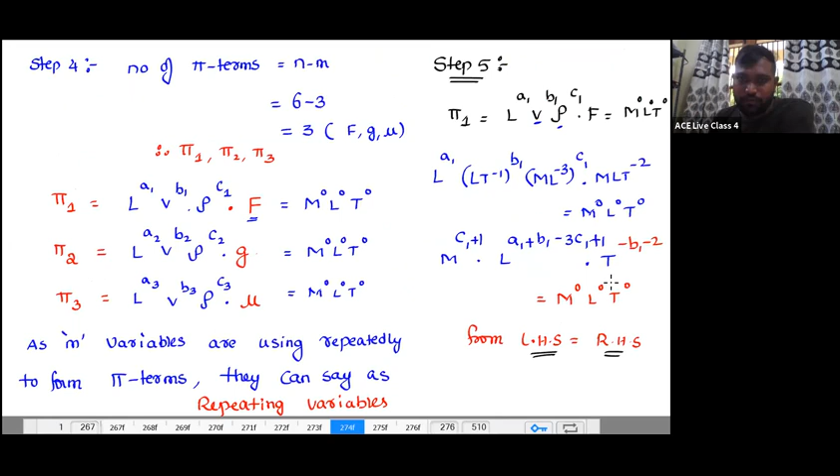I don't know whether you are following or not, or you are in some trance. I'm telling you, you write down in terms of the dimensions, and once you write this, the powers you equate to M to the power of 0, L to the power of 0, T to the power of 0. And once you know that, from here, how do I find out C1? How do I find out B1? How do I find out A1?

Similarly, you write the dimensions for these two, pi 2 and pi 3. You will get pi 2 and pi 3. Please try it at home, then you can understand much better. So now, the relation between pi terms is: pi 1 is a function of pi 2, pi 3 and so on.

So what is pi 1 here? Pi 1 is nothing but F by rho L square V square, which is a function of pi 2, gL by V square, and pi 3, mu by rho VL. Can I write Fr square? Froude number is V by root gL, where L is D in open channel flow. Reynolds number is rho VL by mu.

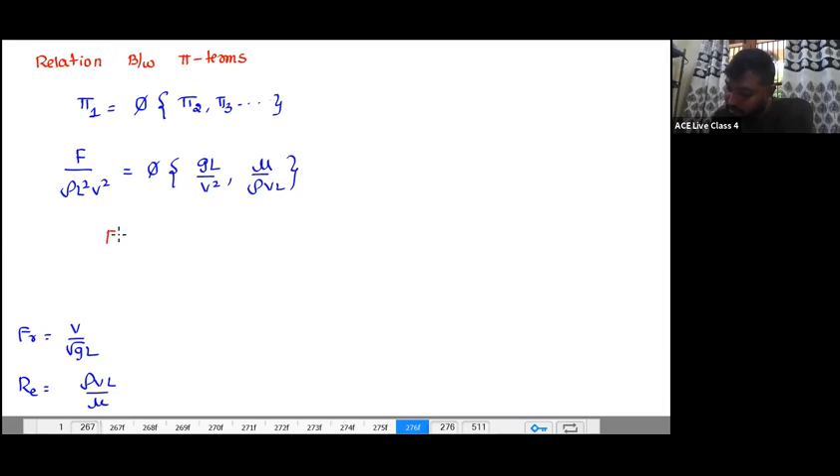Now, can I write this further? F by rho L square V square is a function of 1 by Fr square and 1 by Reynolds number. This is the relation. I started with this. I'm asking you to write the relation in dimensionless form. Froude number does not have any dimension, Reynolds number does not have any dimension, and this force ratio does not have any dimension. This is the relation between the dimensionless terms.

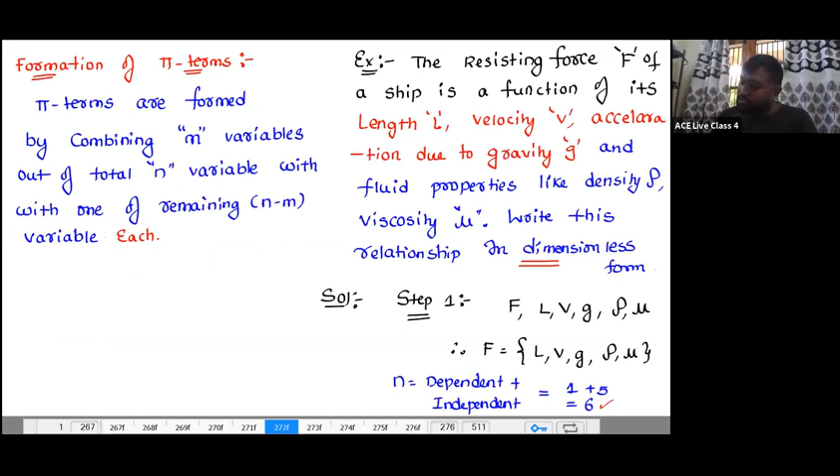I took 6 variables and I ended with 3 variables. I started with 6 variables, and the final answer consists of only 3 variables. If you know the total number of variables, this is how to get the relation between those variables in terms of dimensionless groups. Okay, please have a look.

So the main important terms, apart from this, viscosity is there. If, for example, they give kinematic viscosity, kinematic viscosity is meter square per second. These are the main things, and apart from this, not much is required. This is kinematic viscosity, nu, and this one is dynamic viscosity, mu. So that's all with this method. We can expect this question in the conventional part, IES mains.

But in this chapter, the most important part is yet to come, that is model tests and model studies. Today the discussion was about dimensions and methods of dimensional analysis: the objectives of DA, dimensional homogeneity, and the methods. In the GATE examination, they'll ask how to find out the number of pi terms only. They won't ask about the formation of pi terms. So go through this example; I have written everything clearly.

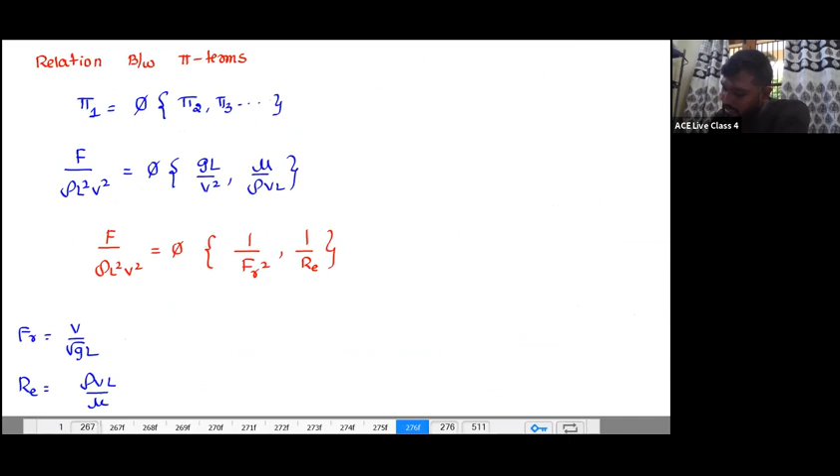Is this chapter completed? No, it's not completed. The last objective is very important, and we'll be discussing it tomorrow. By tomorrow dimensional analysis will be completed.